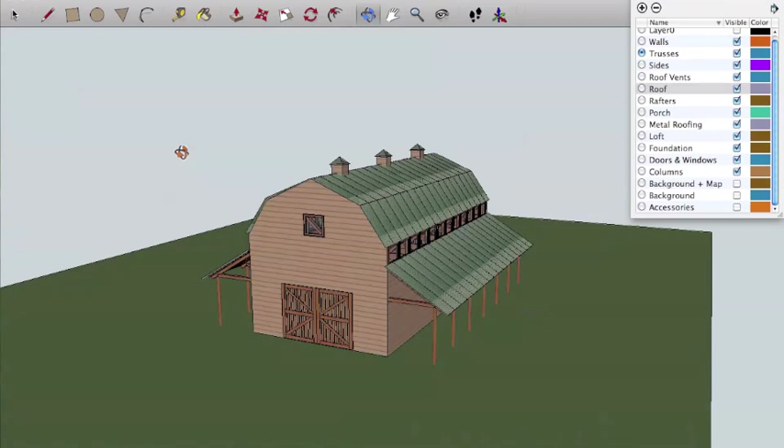Here is the barn that I've designed so far, and I would love to get any of your comments regarding how it looks or how you think it's going to function.

Mainly the barn will be constructed out of timber. It has a corrugated metal roof across the entire structure. This short dimension here will be 24 feet long, and in the long direction it is 48 feet.

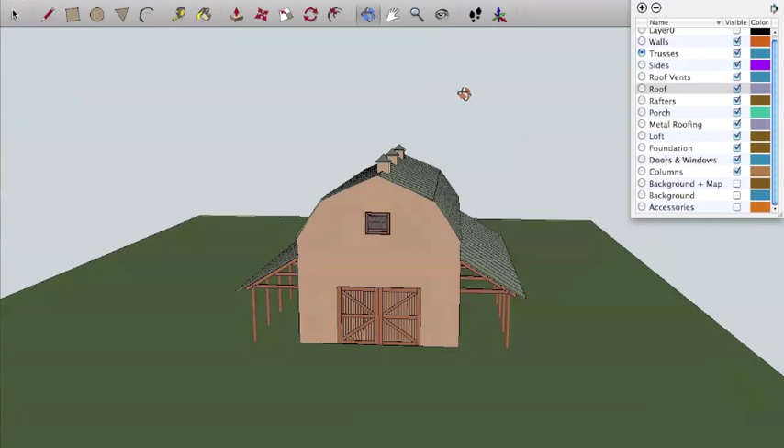In addition, we have these open air awnings on the side. Those will be another 8 or 10 feet wide, and that will give an outdoor space where you can do any work, but with cover from the rain.

Now I've based everything on an 8-foot grid spacing. All of these columns, and you'll see on the interior, is an 8-foot spacing, and that's so that we can use 4x8 sheets of plywood without having to do any substantial cutting on site.

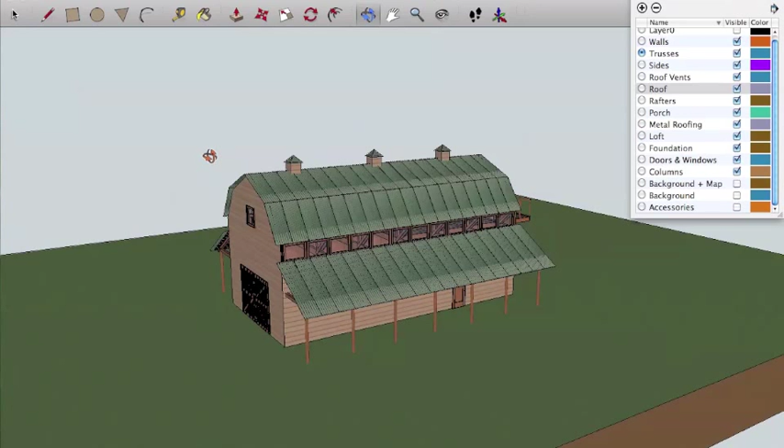All of these pieces are going to be fabricated and set up without really any access to electricity, so we're really trying to minimize the use of power tools, and that is especially important when cutting large objects like sheets of plywood. If I turn off the roof, you can see that the main structure is built out of these heavy timber trusses.

These trusses, the shape of this roof is known as a gambrel roof, and that basically allows you to span a further distance. It has a nice shape to it, but it also provides a large area for a second story.

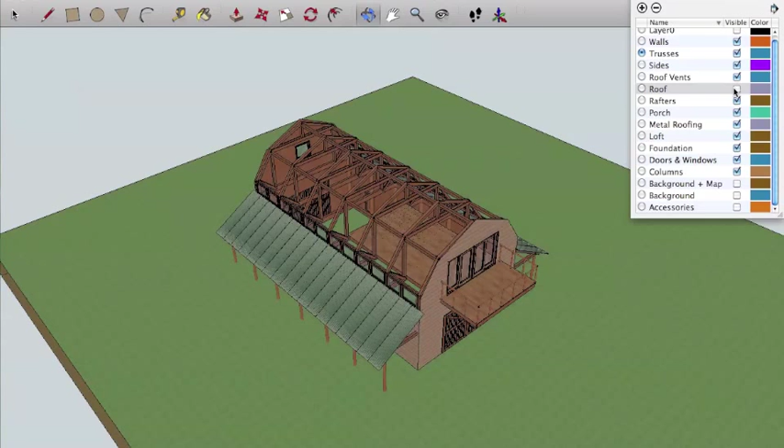So you can see that I have this kind of loft structure within those timber trusses. It's a fairly utilitarian structure, as you would expect for a barn, but I've added a couple of architectural features that I think will make it a lot nicer inside.

As you can see, I have this porch on the back, as well as this clerestory of windows running along the entire barn, and that will let in any daylight onto the inside and really make the space feel a lot more open.

In addition, this slanted part of the roof here is facing south, so that would be the perfect place in the future to add some solar panels if we want to generate electricity on site.

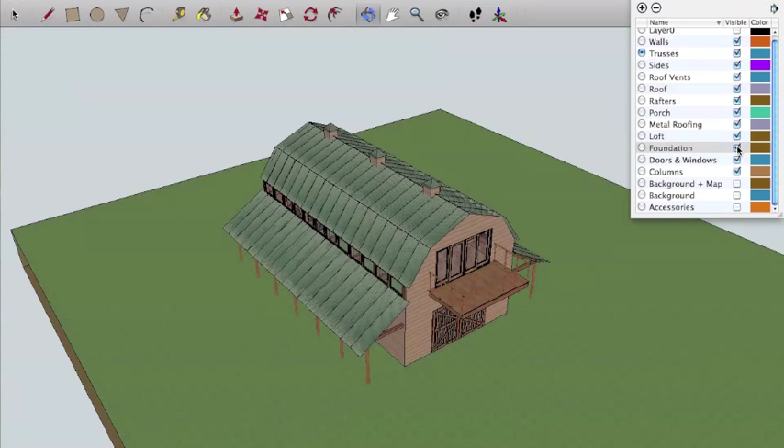Now I'm going to zoom out and show you how the location of the barn relates to the rest of our property. So the front of the barn faces directly at the road, and that road makes up the front corner of our property.

It's situated basically at the lower end of what's currently a large wild meadow. This will eventually be the best area for food production on the property, so it makes sense for the barn to be close to that front corner.

If I turn on our property lines, you'll see that this is basically the area where I was filming in the second location of my last video. If you remember, there's a steep drop-off, so locating the barn here will ensure that it's up and out of any potential flooding that could occur from the creek.

I've also designed that back porch to cantilever out from the rest of the structure, so it will really make you feel elevated above the land below, and it will be a great outdoor space to sit and work or read, basically to relax while listening to the stream below.

Let me zoom out a little bit more and show you how this relates to the overall property.

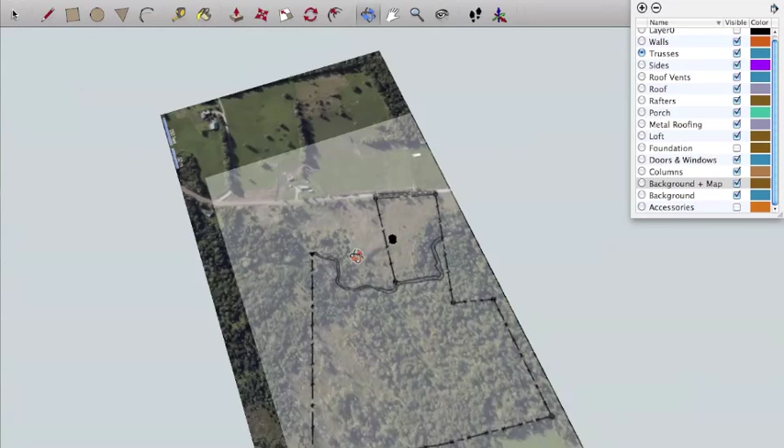So the barn is in the very front portion, which is just 5 acres until you get to the stream, and then the main wooded section is behind, and that will be the area that we eventually, probably in here, devote towards building a cabin.

So part of the idea of building the barn this summer will be to give us a place to work and to really craft the pieces that will go into a future cabin structure. I'm going to zoom back in and turn off these background maps that I have.

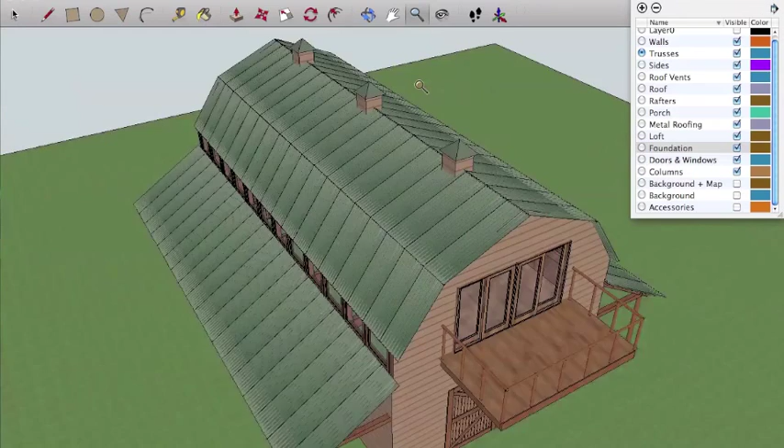Now, other uses of the barn: the main floor structure can of course be used for parking, so this is designed basically to be able to fit 2 cars wide, and we'll have plenty of room to have a total of 4 cars fit within the space.

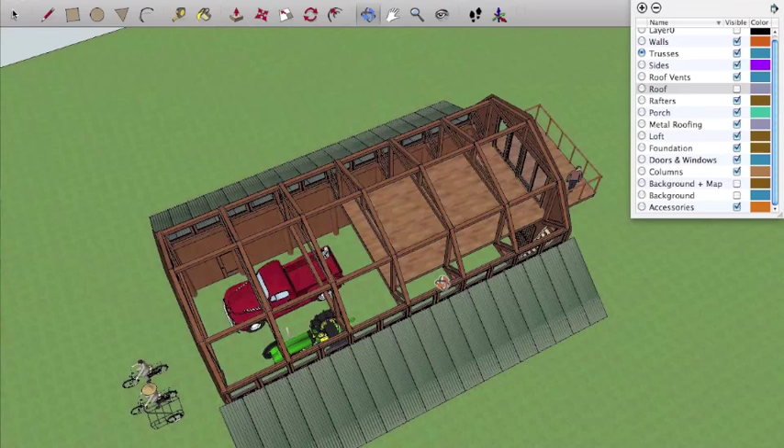This back area can also be used for maintenance and for any kind of craft projects. I think that the loft will be well suited to be a woodworking area, but any larger pieces, especially any large tools like a table saw, would be better situated on the ground floor below that loft.

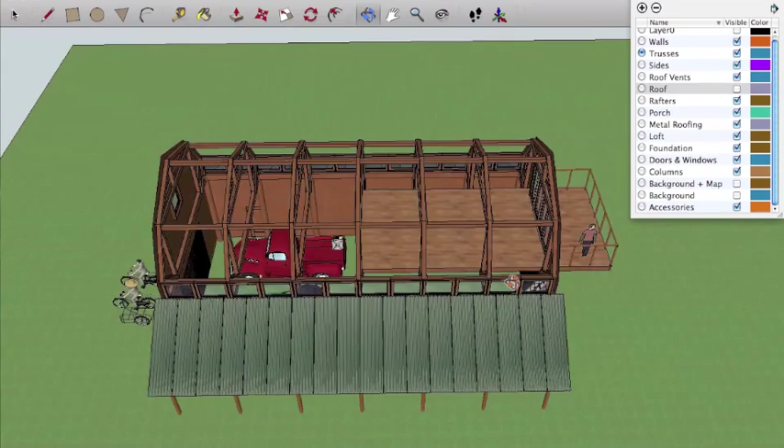That will make it a lot easier to bring in the large tools as well as to bring in any of the pieces like full sheets of plywood. And then when any projects are smaller size, such as finishing or building a small piece of furniture, that can be done on the loft area with the nice porch on the back here.

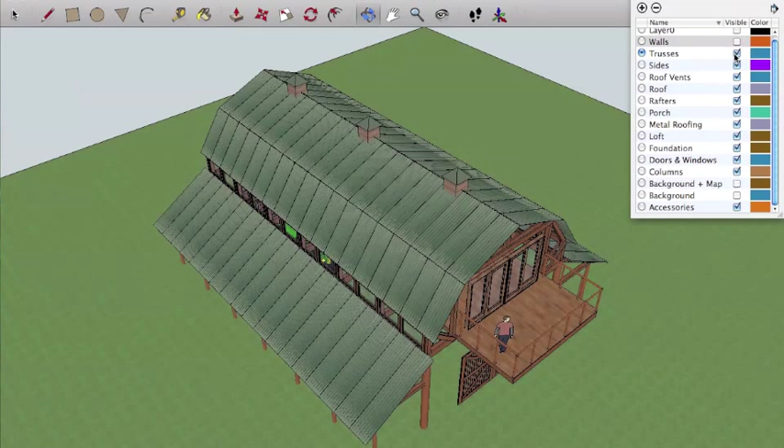Now this summer we don't plan to build everything. Let me turn off the layers that we won't be building. Basically, we're going to be erecting just a shell, so it won't have any walls or any of these details that we've been looking at.

So essentially what we're left with is just an open-air pavilion. This will be a lot easier and I think is a manageable portion to build in our first summer. Then in 2014 I'm going to return to the property and build all of those other features that I just turned off.

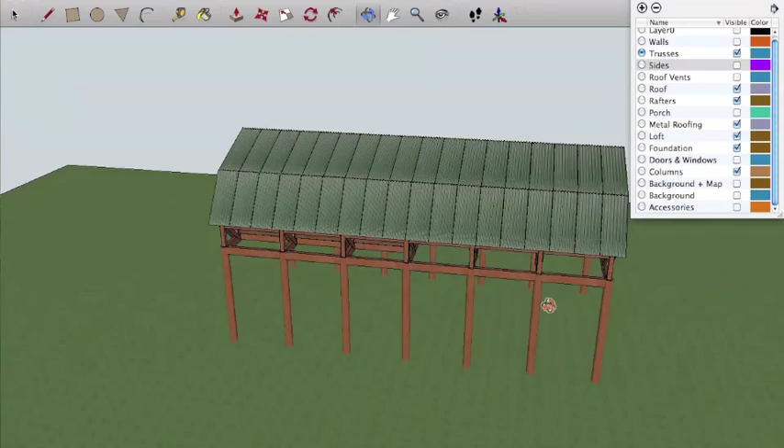Now this construction plan is going to work because it's designed as a pole barn. As you can see here, all of the weight of the structure is carried on these timber columns, and those are embedded approximately 5 feet in the ground, so that the foundation will be well below the frost line to avoid any frost heave problems that you get in very cold climates like northern Vermont.

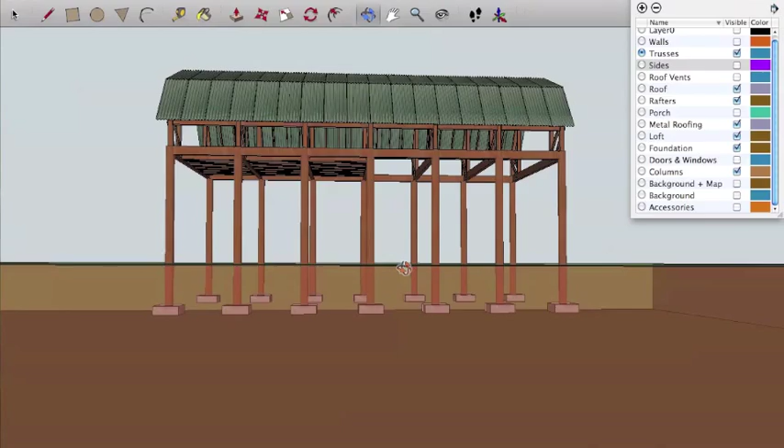Now this design also allows the barn to stand without needing any walls, so when wind blows through on the structure and tries to push it over, these columns embedded so deep will allow the whole thing to remain stable.

So that's my plan for a barn, and I would love to hear your thoughts. What items did you like or maybe dislike? And was there anything that I forgot to mention entirely? Please let me know in the comments below.

In my next video, I'm going to go over how we actually plan to build the barn. And that should be interesting because I don't plan to use any heavy machinery, just hand tools, human power, and a lot of long days and hard work, I'm sure.